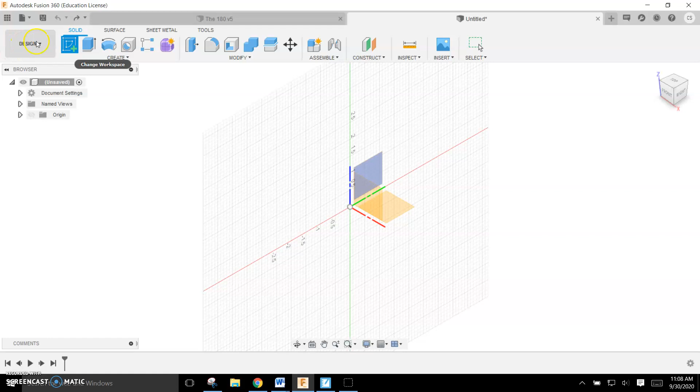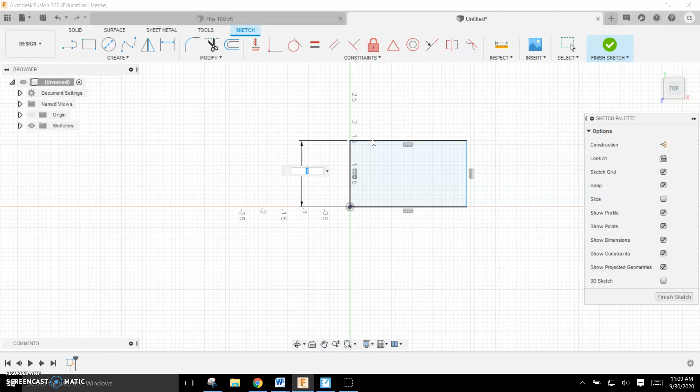I'm going to go ahead and create a sketch on this plane here. I'll just drag out a generic rectangle, and then dimension it accordingly. I want that to be 1 inch, and I want this to be 3.5 inches. I'll hit finish sketch.

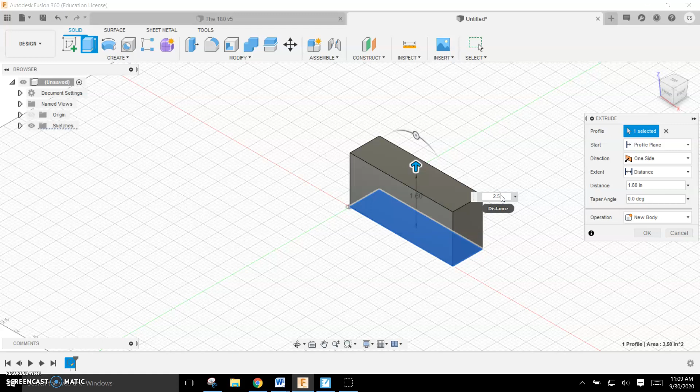Now I'm going to extrude that to see the height of the object. The height of the object is 2.5 inches. Nice. Now I'm going to start adding these holes.

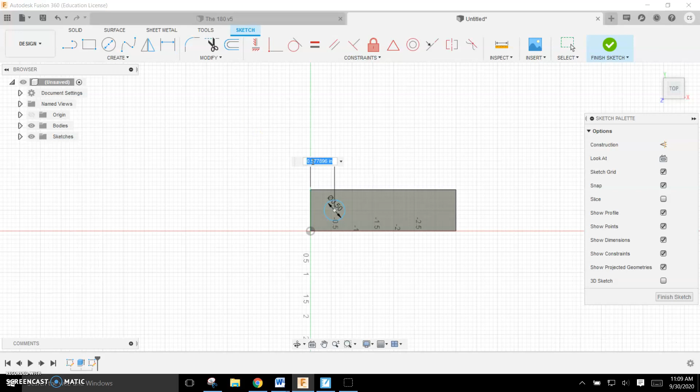I'm going to go ahead and sketch a circle to do this hole. I'm going to put a circle on here, and the circle is going to be 0.5, and then it is going to be dimensioned. From the center of the circle to that edge is going to be 0.75, and from the center of the circle to this edge is going to be 1/2, 0.5.

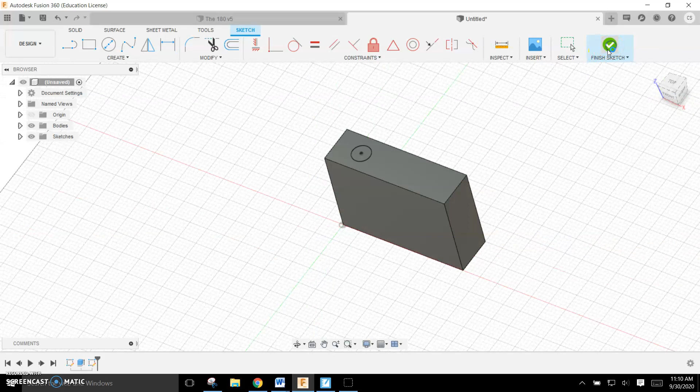I'm going to go ahead and hit finish sketch, and then extrude that circle as a cut. I'll just drag it down there like that. Hit OK. Alright, so I have that one done.

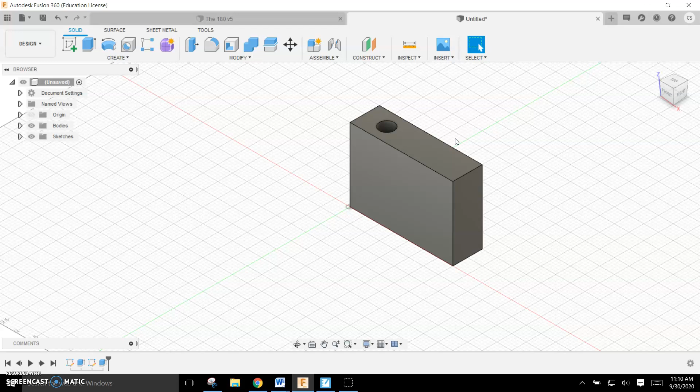I'm now going to put in this other hole here, so I'll sketch. I'm going to just draw the circle on this face. I'm going to go ahead and put a circle there, and that circle is going to be 1.5 in diameter.

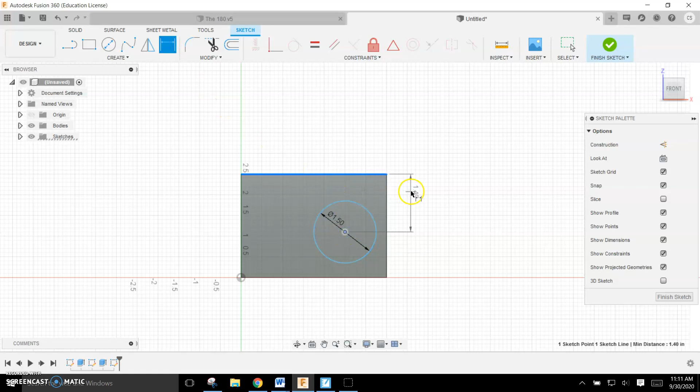And then I will place it from here to here. That distance is going to be 1.5. And this distance from here to here is going to be 1.5.

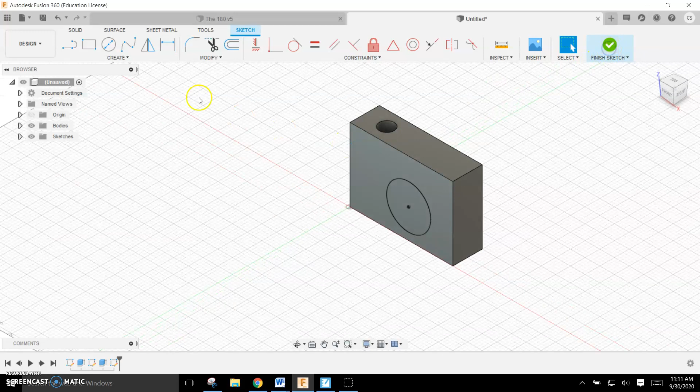And then I will finish my sketch and extrude that. See, that makes it pretty easy. So that is drawing 1 for 1.2.4.